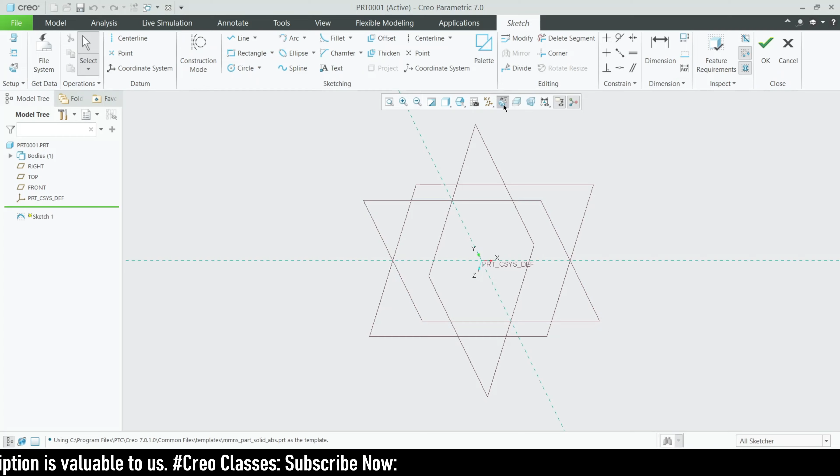First of all, I'm just going to create a profile for using the spinal bend tool. Let's get into the part. I'm on MMNS Part Solid ABS, so now I'm just going to create a rectangular portion here, like this. For the dimensions, let me have some rounded value of 700 by 100. Then let's go for the extrude, with a minimum value of 10. You can go with your own values.

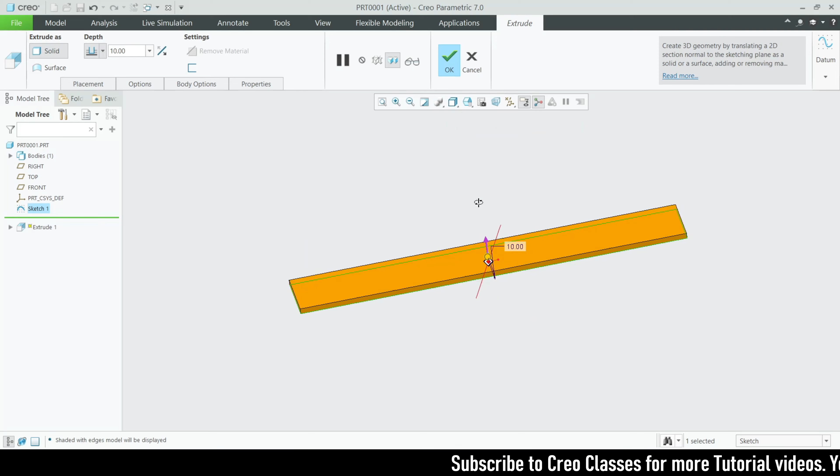First of all, the spinal bend comes under the engineering section. We have previously seen a tutorial video on the toroidal bend, so I think you guys have seen that video. If you don't know about the toroidal bend, kindly go and watch the previous video.

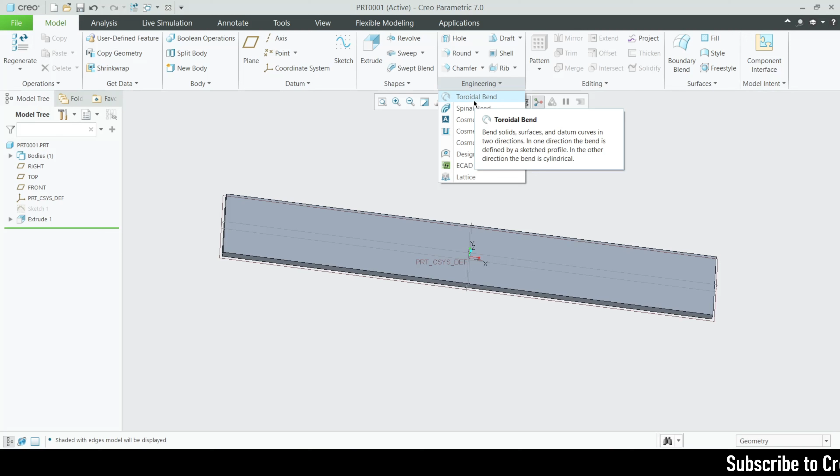I had a deep explanation on this toroidal bend, so now we are going to see this spinal bend option. Both toroidal bend and spinal bend are similar, but compared to toroidal bend, spinal bend is somewhat easy, and as an important tool, I will use spinal bend mostly compared to the toroidal bend.

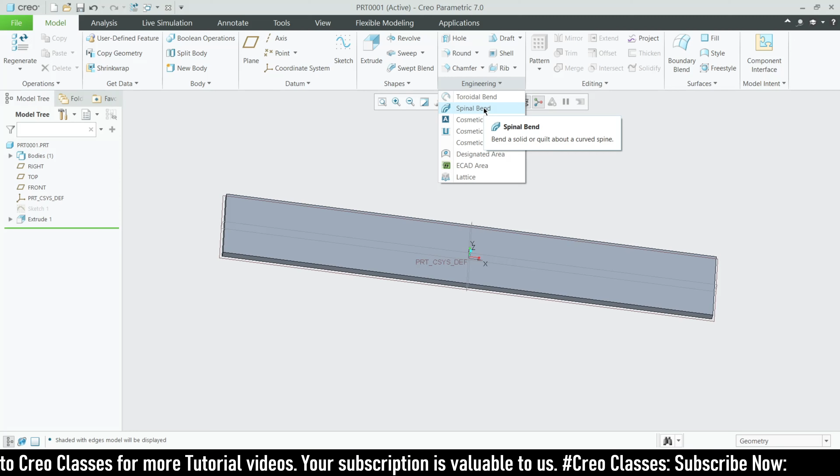For the spinal bend, first of all, like the same for the toroidal bend, we have done a solid part, and then we have to create a spine, right? According to the spine, our solid part will move along that. Now we have done a solid part, so for the spine, we have to create the pathway of our sketch.

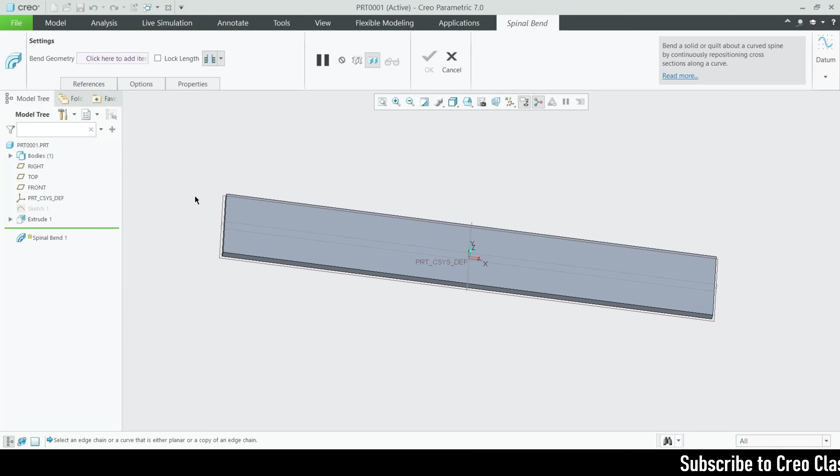Before that, let me get into the spinal bend. Once you get into the spinal bend, you can see the first option we have to select is the bend geometry. The bend geometry is nothing but the part which we have to bend. You can't just select a particular extrude or anything, you have to select the option. Now you can see when you move your cursor along to this, this has not been selected as an extrude, so this will be considered as a body.

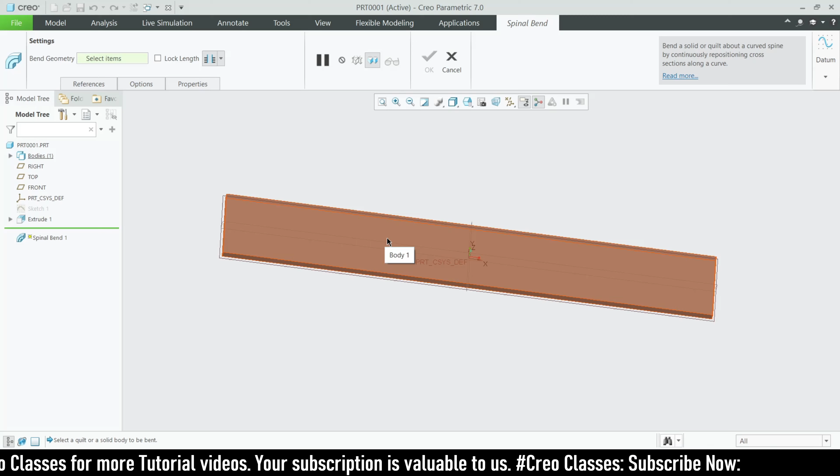Either you can select this surface like this, or else you can open this and select this body. Instead of this, you can directly select here also, if you have multiple options in here.

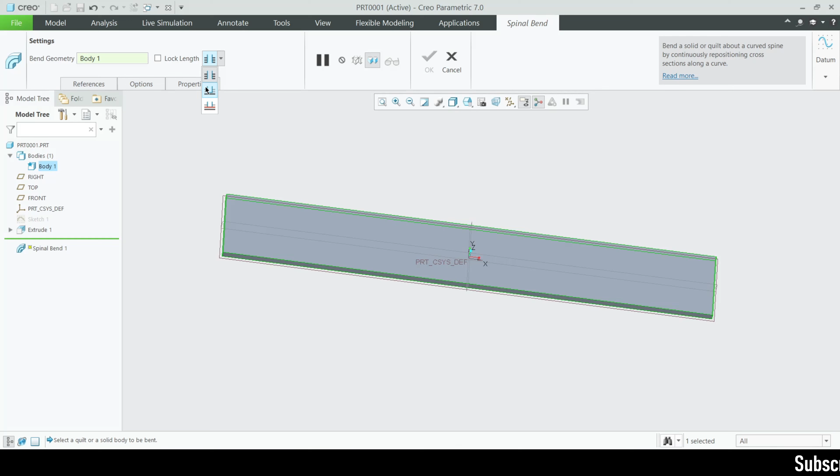Now here we have a lock length option, and we have these kind of things in the extrudes and revolves, right? So we have similar options here. We have to use this once we imported our sketch for the spine.

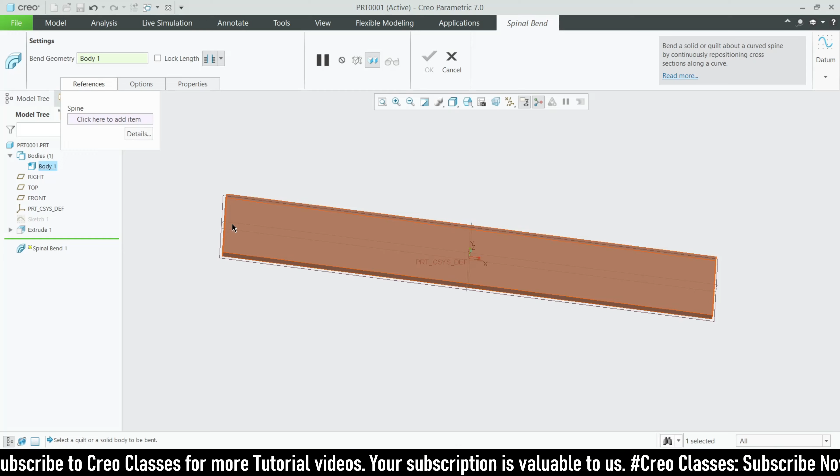Then when we get into the reference tab, here you can see we have to add the spine. In this spinal bend feature, we can't add the spine in here, so we have to add the spine separately in sketch mode. Now here we have a separate rule for the spinal bend for creating the spine.

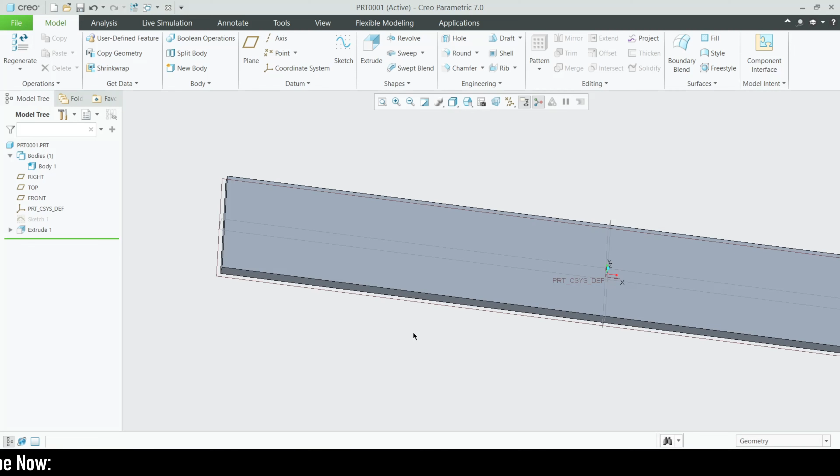In the toroidal bend, if we create a sketch for our spine line, we use the coordinate system to start our sketch, right? Whenever you are going to create a profile here like this, if you are using toroidal bend, and you need to bend this into a curvature like this, you have to add a coordinate system here, and then from the center point of the system you have to start the curve like this. So in toroidal bend you do like that.

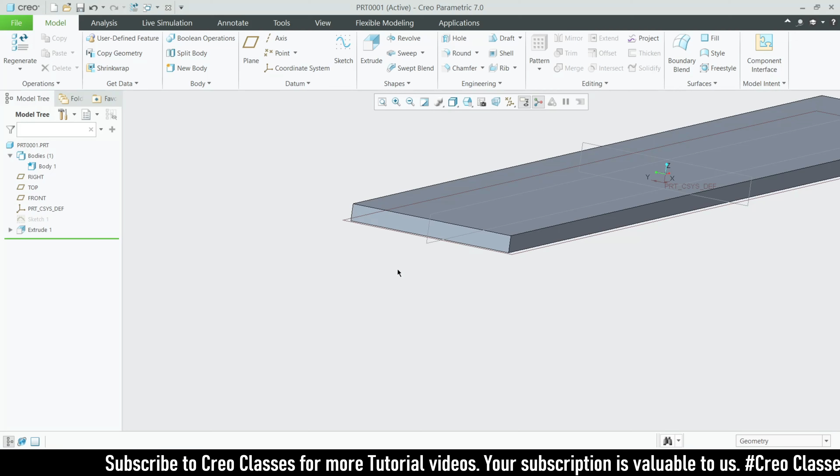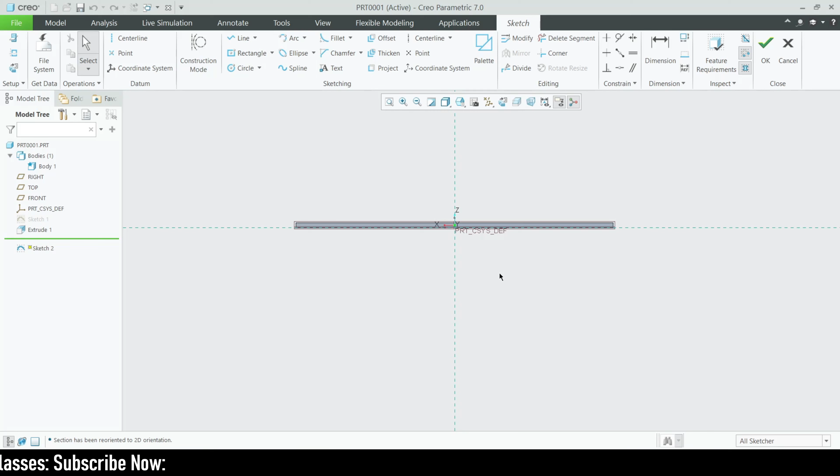In this spinal bend, you directly sketch on the center plane. Once you get into the sketch view, you can create a spline in whatever direction you want to make it. But here also you have some sort of rules you want to follow under this spinal bend for the spine.

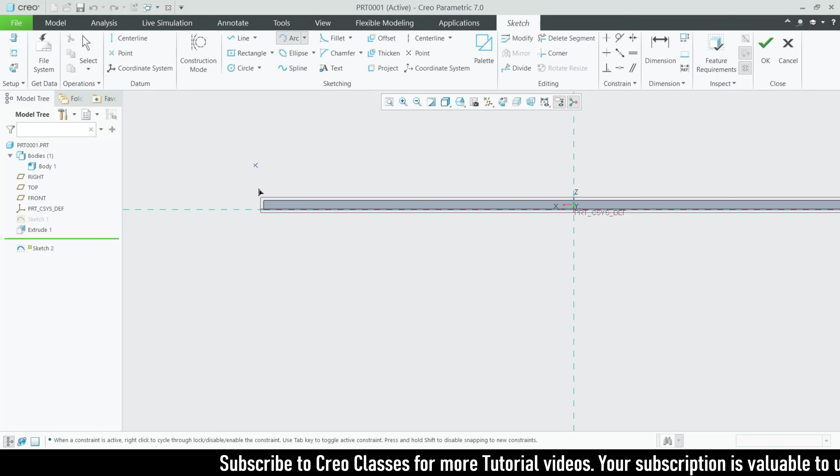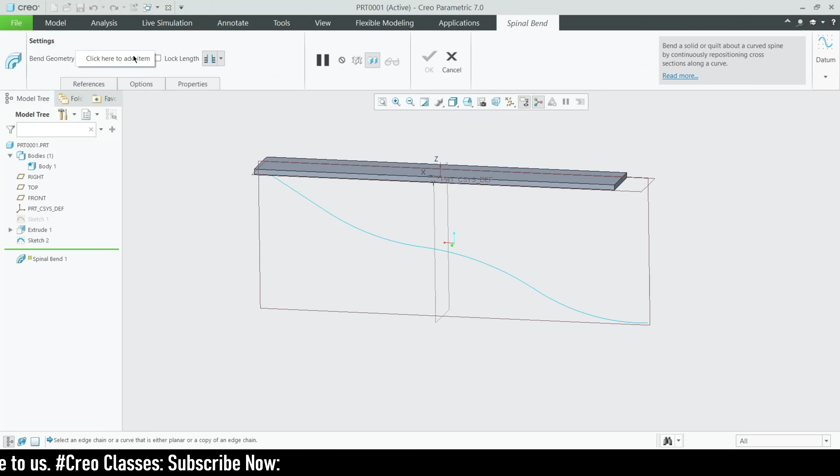Here you don't want to add any kind of coordinate system for your sketch, but you want to start your spine with a straight line. Let me take two examples. For the first case, I'm just going to start a line like this, and then I'm going to draw a couple of arcs. I need my path to bend like this under the spinal bend. Now if I'm just going for the spinal bend, I just have to select the bend geometry, right?

And then on the references, let's go for the spine. If I select this spine, you can see the path, right? So this is the pathway, but you can see how our path has become like this. So this is not the required shape, right?

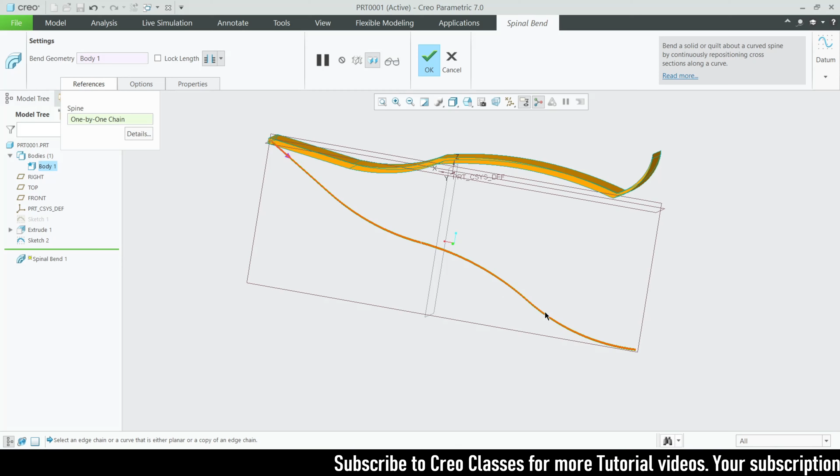It's because you have drawn a slanted line to start your sketch, right? So this is not how we have to do it. Let me just undo the operation and delete the sketching here. Now let me go for the second case.

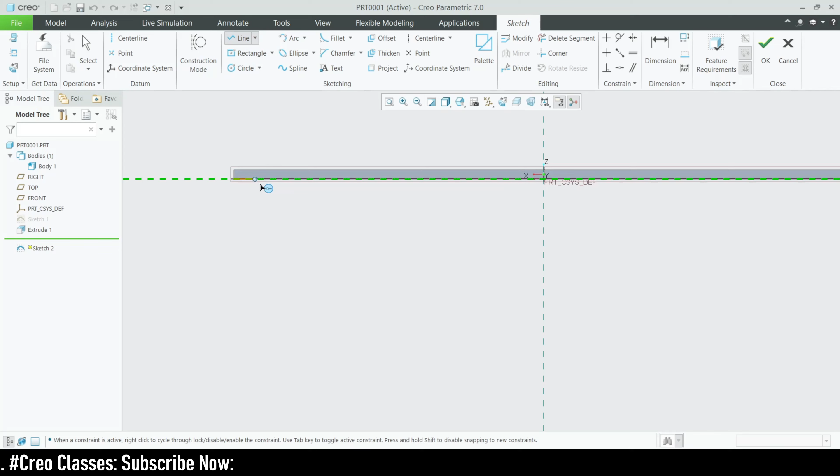So this is how you have to do for the spinal bend tool. Now you have to start your line like this. You can stop up to this also. Now you can start creating a pathway for how you want to bend this part. If I click OK, now we have done our sketch.

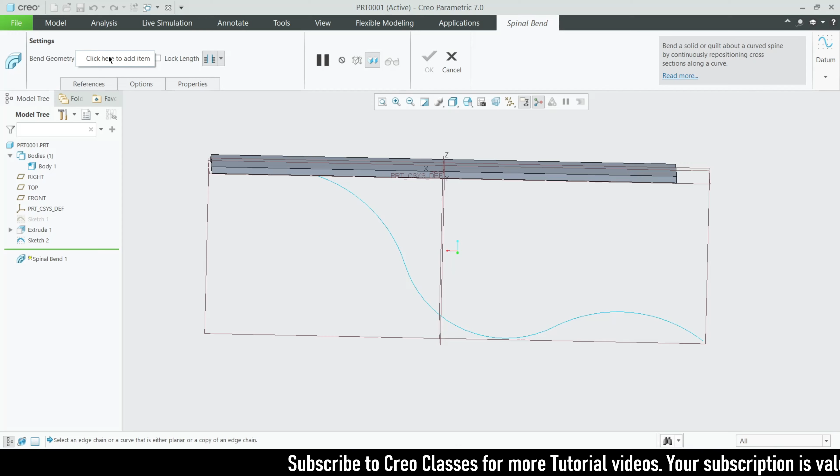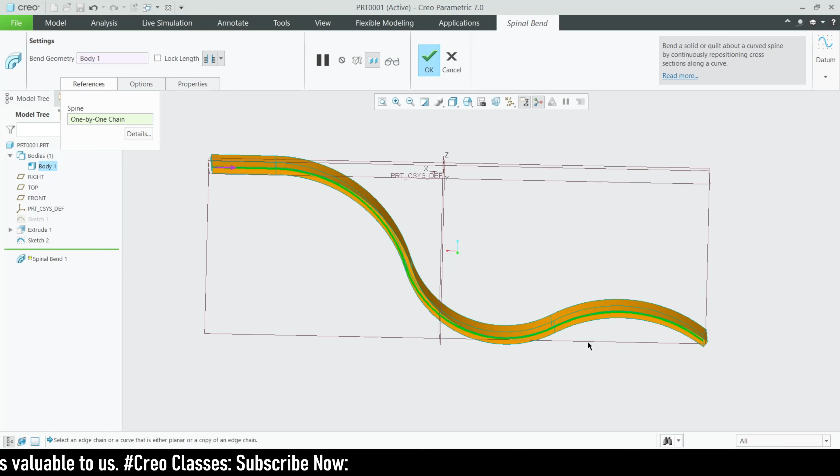So let's go for the spinal bend. Here we have to select the bend geometry, and under reference we have to select the spine. Now if I select the spine, you can see the part hasn't gone along this pathway. Why? Because the direction should be on the straight line.

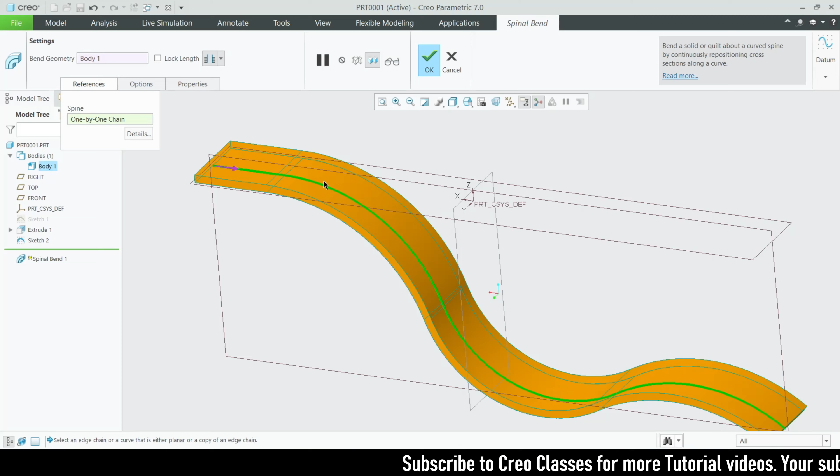Now when we flip the direction, you can see the flat surface bend along with the pathway. In the first case we haven't used a straight line, we used a slanted line, so the result is towards the top. Now here we have done a straight line and created our pathway, and you can see the part is bent along to its position.

Now let's explore the main tools whichever we want to use under the spinal bend. Basically we will use this main option. These two are very important options.

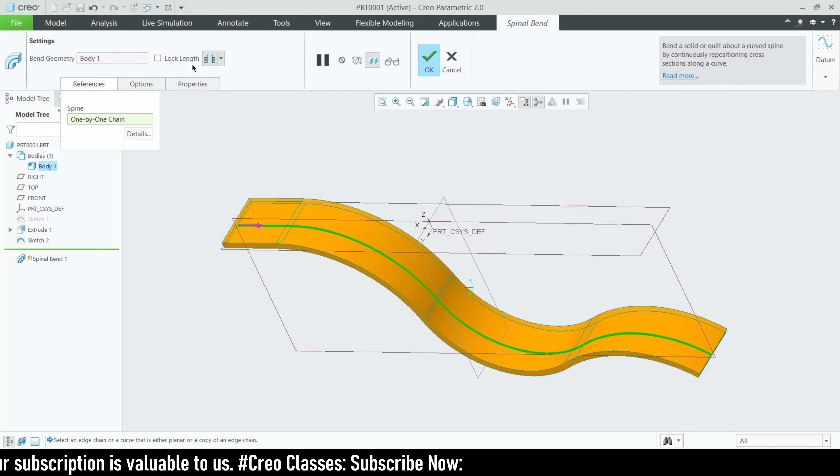The first one is lock length. So what is the lock length option? Here you can see our first profile we have done, the line here. This is our rectangle, so that length will be 700, right? So the length will be 700, but here the curvature length will be around 1000 or 1200 definitely.

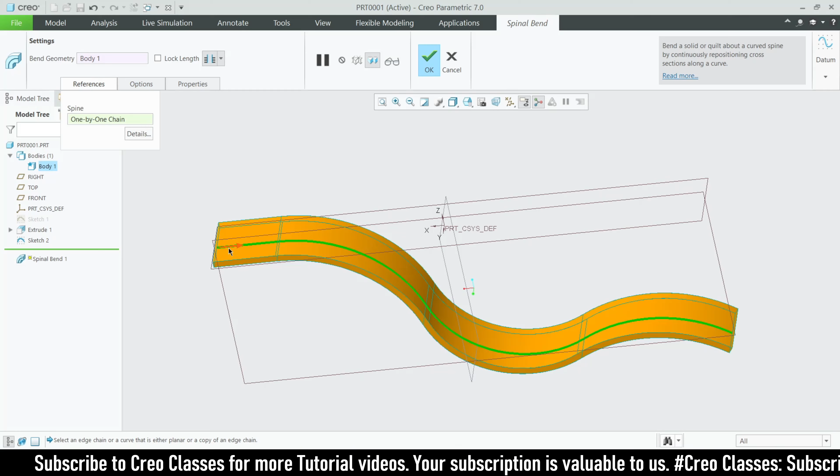So the 700 is up to this point, but here the bend geometry is bigger than the previous geometry. Anyway, the flat surface has become a curved surface along the curve that we have drawn. If we click on this lock length, you can see the curve has stopped at a specific point.

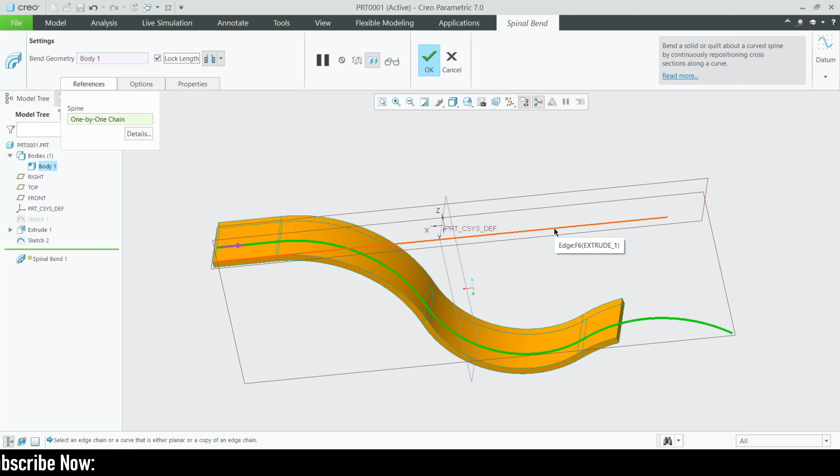Why? Because the section we drew previously has a length of 700 and width of 100, right? So the length of 700 is calculated for this curve, and it has stopped at the level of 700.

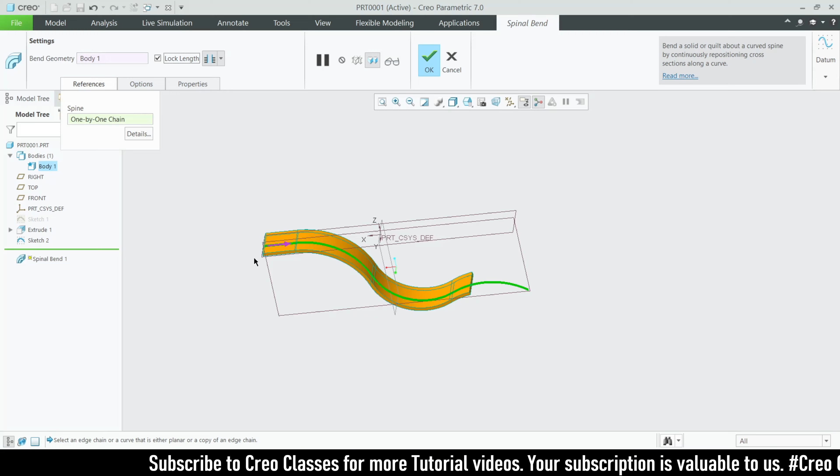So this option, if you want to create any particular part according to a dimension - for example, if you want this curve to a length of 1000, you would draw a rectangle up to the length of 1000 and create your curve like this. I think you guys have understood.

So this is the use of lock length, and you can undo it. If you don't want to use the lock length option, you can unclick it.

So now here, like I said before, we have a couple of options - these dimension tools and these images that we have seen previously on the extrude and revolve tool operations. But here this entire thing will be different - it's not about symmetric, to next, or up to the selected surface.

It will be similar, but here the tool and the operation may be different. The first option is to bend the entire selected geometry from the spine start, so the part will be bent along the axis from the spine start.

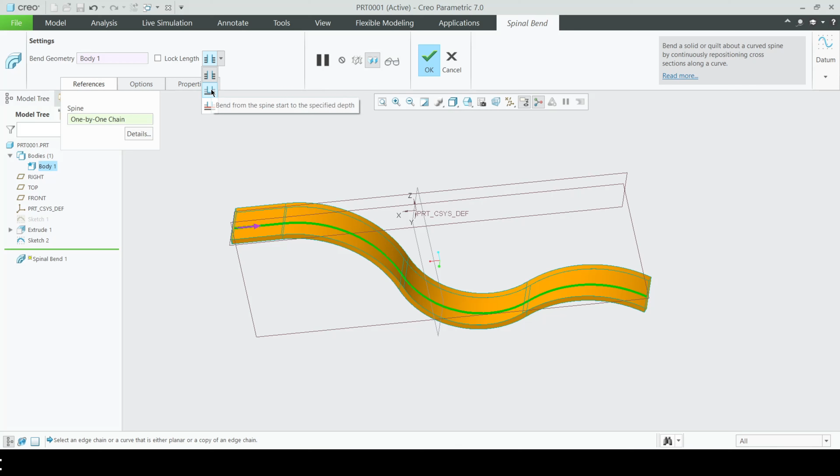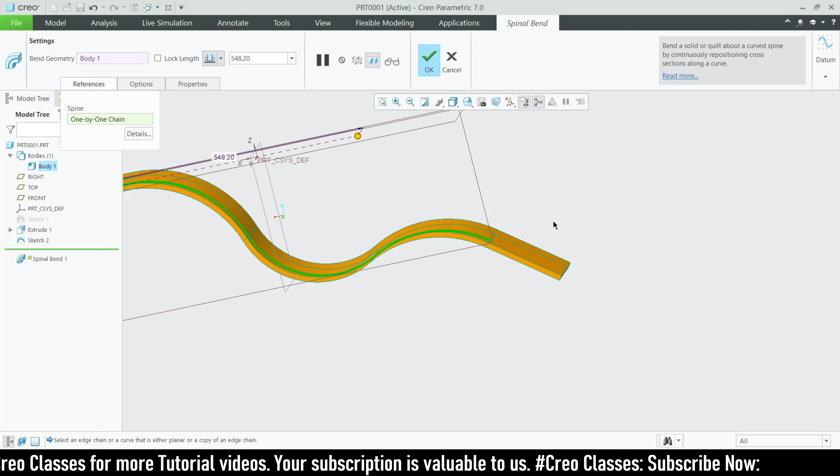Here you can extend the part up to wherever you want, along with the tangency of the previous curve. If you have a straight line, the part will be created according to that straight line, as a tangent feature. You can manage the length by adjusting it here, reducing or increasing it.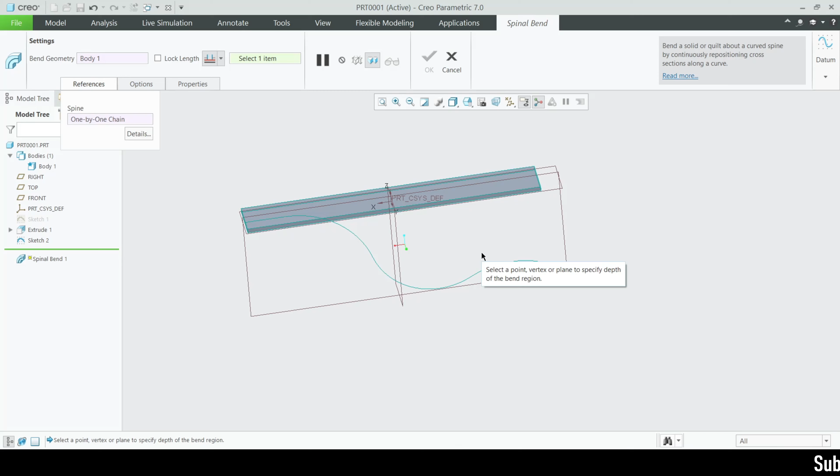The next option is, whenever you see a red line, we have to select the surface up to which the part needs to be extruded or created. If we select a surface, the part has been created up to that selected surface. We don't have any specific surface here, but if you have a separate model, you can select that surface and extrude up to it.

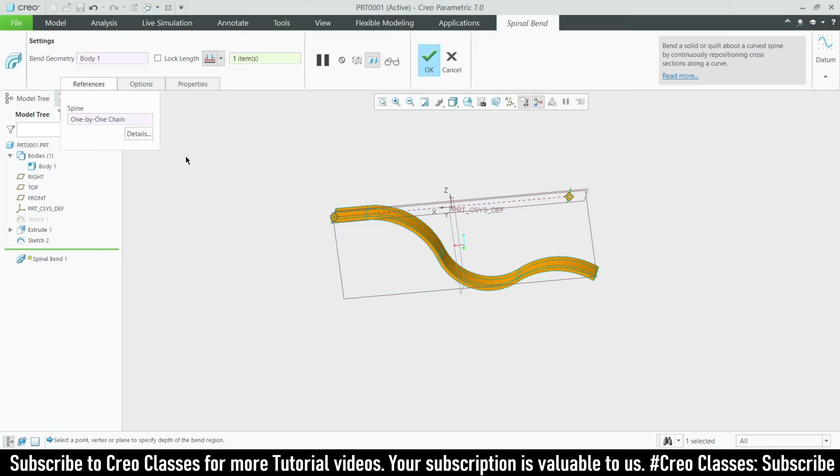Particularly we will use the first option, and here we have a lock length option, which is what most people will use.

Now in the next case, we have a normal extruded thing. Let me just make it into a complex part and see how it works.

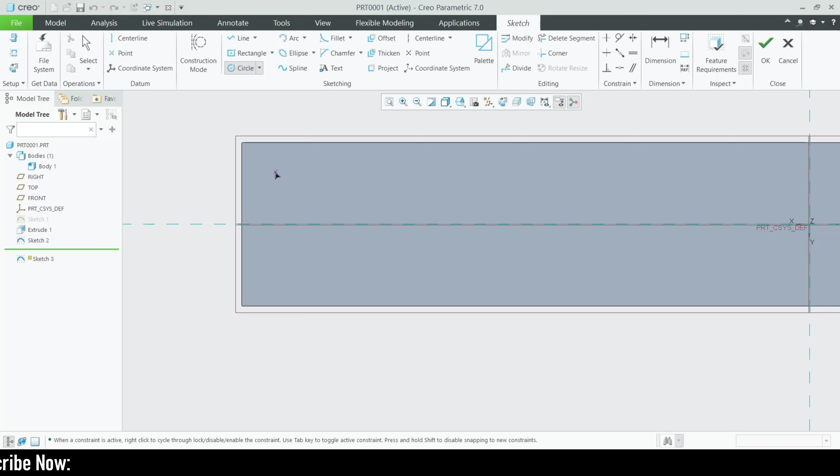I'm just going to add one and two, three. Let me mirror it, set the diameter, that's fine. Let's extrude this to a value of 10 to make it clear, and I'm going to pattern it.

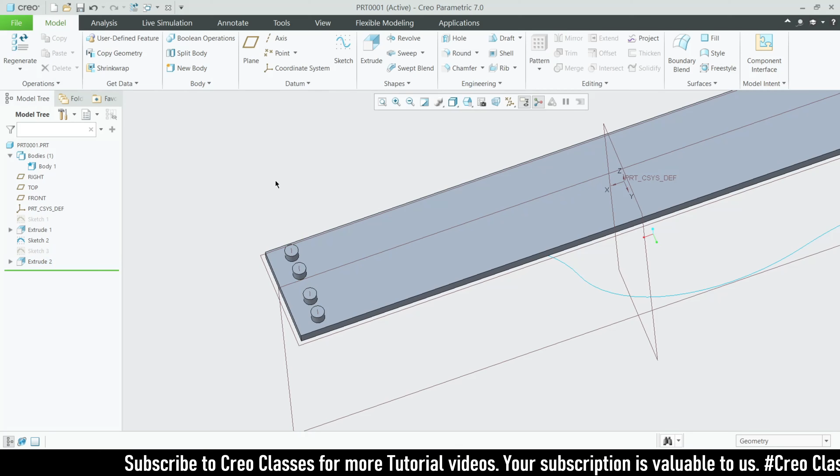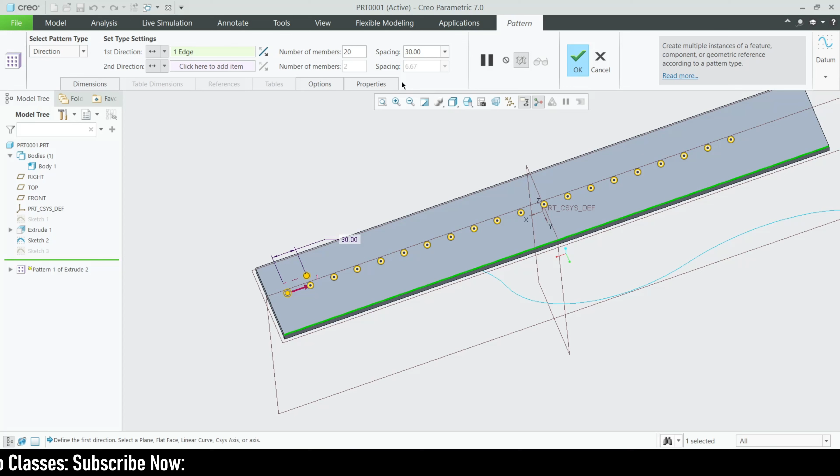Make it as a direction part, set it to 30, then 20, and let's see whether the distance is correct. The distance is good, so we have to adjust the number - let's go for 25, that's high, let's try 20, 23, and let's reduce to 29.

So this is the profile that we want to bend here. Now let me find where the sketch is, so we have to bring that in. Good, now let's go for the spinal bend.

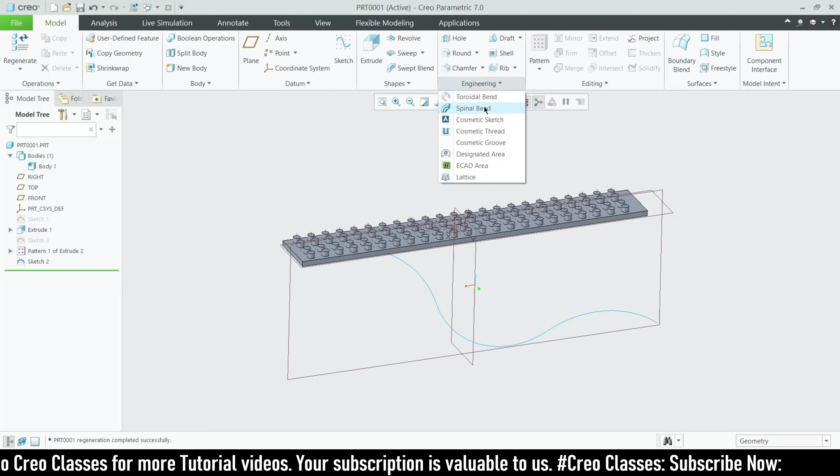Let's go for the bend geometry. You don't need to select everything - we can directly select here itself, or go for the bodies. Under the bodies you can see body one, you can select it like this too. Let me select the spline here, and let's switch the direction.

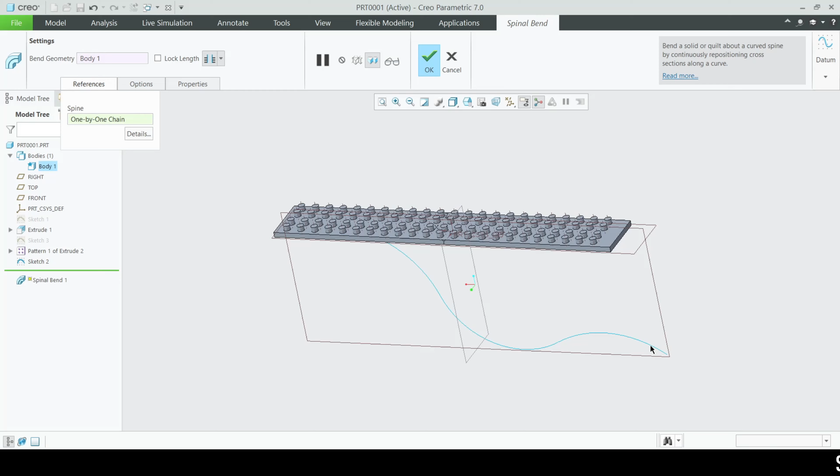Now you can see the flat profile with some extruded parts bent according to its geometry. So this is how you want to use this part. And here we also have a lock length option.

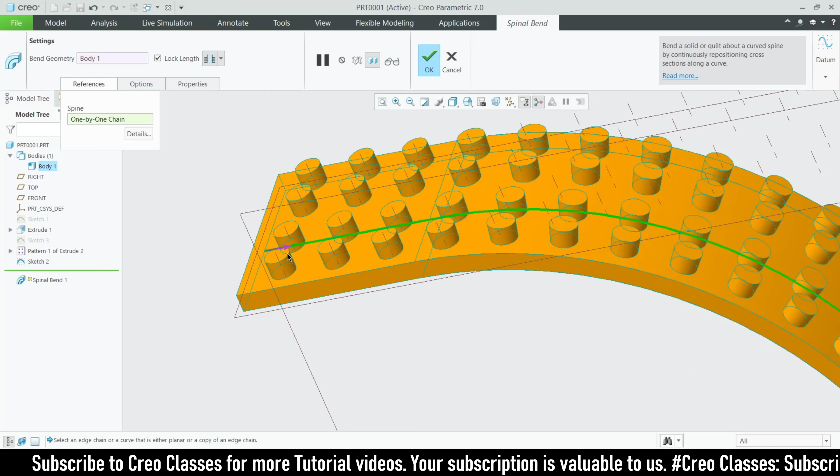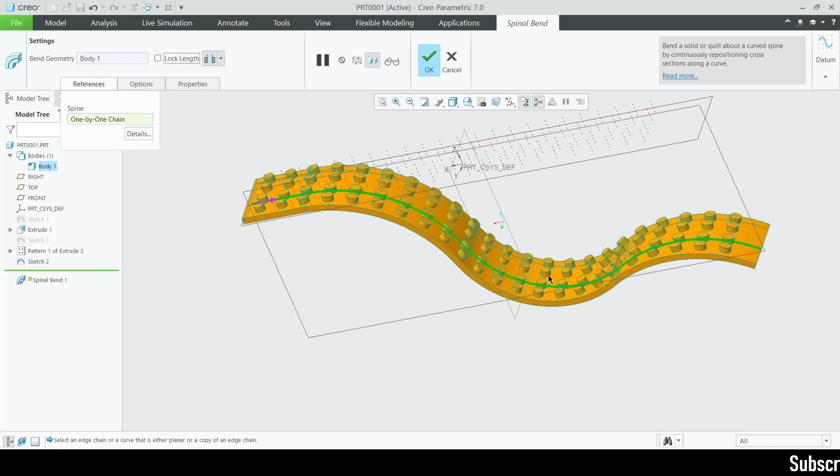According to that profile, the circular parts are now close to each other. When I unclick this, you can see it's somewhat expanded - this is the normal length, height, and width of the profile. Once you unclick this, you can see the part has been bent and extended according to this curve. This is how you use the spinal bend tool.